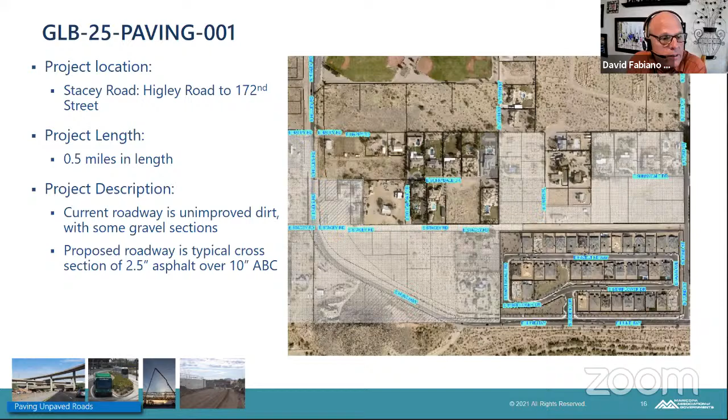Next slide, Steve. That's our typical cross section that we're looking to put in there, a local residential street. Because of the drainage and the offsite drainage coming across and through along this facility, it creates a bit more of a challenge. We're trying to fit into this environment as gently and carefully as we can to get something maintainable for the long term.

The town is willing to annex the entire road and take it over for maintenance, even though it does have those unincorporated areas along it. Next slide.

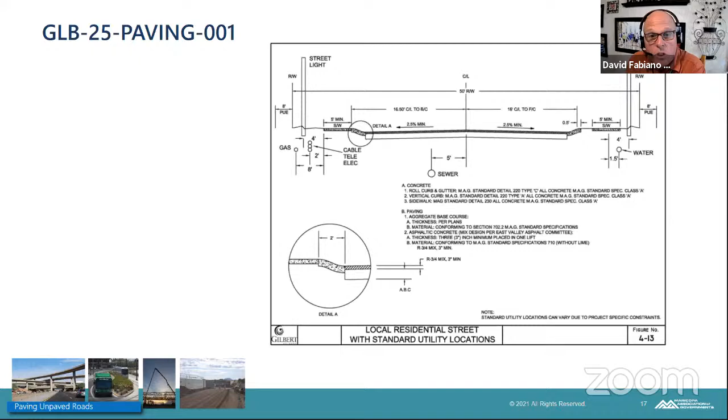Here's some pictures so you can see some of this, on the east end. You're at the first picture, at 172nd Street looking to the north. And we always put power poles in with nothing on them, leaving them sitting right in the middle of roadways. Over on the right side of the screen, again, lots of hair on this one -- we're trying to cut it, clean it up. That's where it comes onto Higley Road.

This is an area where sight distances and a lot of other things are going to have to be taken care of. Drainage is coming again from the south and east, across Hunt Highway, off the Santans, causing quite an impact to these residents locally when it rains.

That middle picture shows the new subdivision on the southeast quadrant of that quarter section, and that's the part the town actually owns -- that piece that's dedicated, kind of back behind that shrub that was left there. But the road improvements were never made. That developer did make a payment of $160,000 for their portion of it, but that estimate was premature because the impacts are quite a bit larger than that.

Next slide, please. Okay, I think that was the last slide. So this is, again, one of those areas where we're in a checkerboard situation. The town has a small responsibility right now, willing to take on more, because it's one that the county really is probably not well suited to be able to handle.

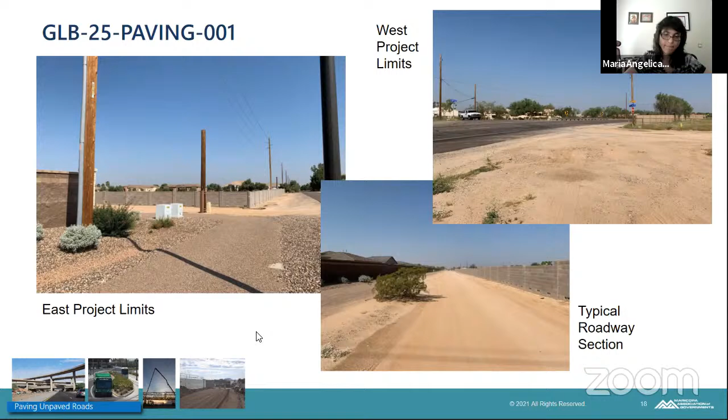Next slide, please. This project is from the city of Maricopa, for Murphy and Hartman Road. Rudolph Lopez will now present.

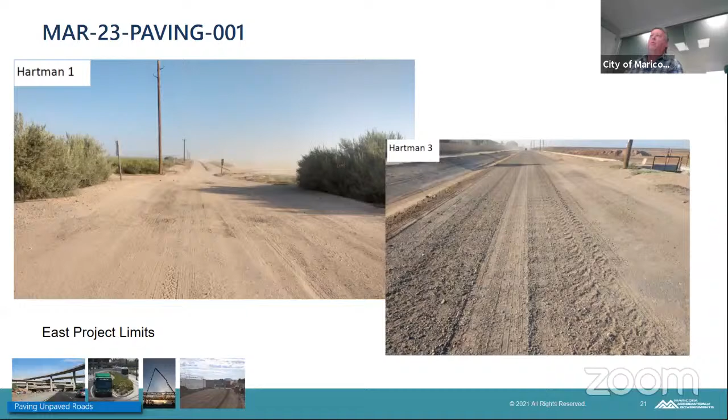Madam Chair, this is Mike Riggs. Our property city limit boundary ends on the north side there, if you want to go back one page on the map. However, that is Gila River Indian community next to us. There is a full section of property within a quarter mile, like a little island within the reservation property lines that are trying to go in for planning for future residential.

So eventually it would include the residential traffic from the Indian community to the north of us, and then potentially in the future, it would help cover some of that residential traffic coming out of that island within the reservation.

Thank you. David? Yes, just one more question. With that future traffic you've referenced coming from the north, is the double chip on 8 inches a section that the city is comfortable with, or is that just more of an interim section to try to improve the condition until a future time?

Thank you, David. That would be an interim solution for now. We don't have a ton of information on that residential section, so it's interim for now.

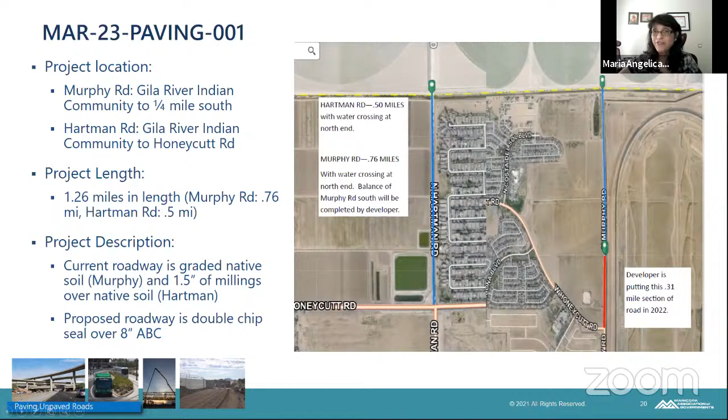Steve, please present the next presentation. Okay, the next slide is from the Salt River Pima Maricopa Indian community. It's for Clarendon Avenue and Cholla Lane, and it will be presented by Jennifer Jack.

Good afternoon, Madam Chair and Street Committee. My name is Jennifer Jack with the Salt River Pima Maricopa Indian Community, and I have 3 projects that I'll be presenting. The first one is Clarendon Avenue and Cholla Lane. Next slide.

This section has a little piece in between that doesn't connect to Cholla. So it's Clarendon from 92nd to Dobson, and then Cholla from Indian School to Clarendon, and then Clarendon from Cholla to Longmore Avenue. The total length is 1.13 miles, and it's currently a gravel surface.

We are proposing to pave with 2 inches of asphalt over 6 inches of ABC. There are currently 9 homes on the first piece of Clarendon, 4 homes on Cholla, and then 3 on the other section from Cholla to Longmore.

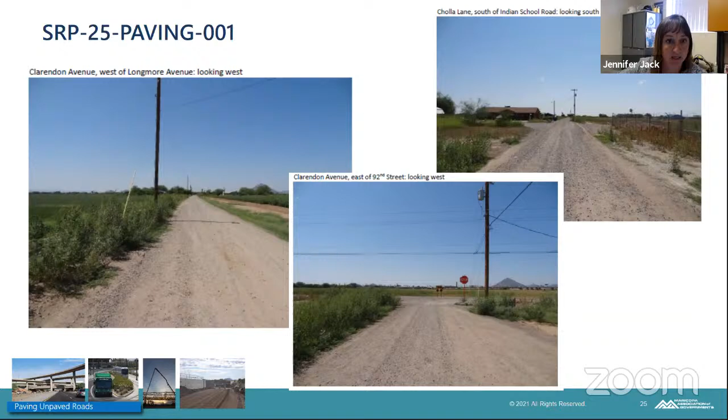We'll go ahead and go to the next project. Next slide, which is Jackrabbit Road. Next slide. This is Jackrabbit from Dobson Road to Alma School. And this does have a school bus route on this roadway. It's 1 mile in length, and there are 10 homes located along this segment.

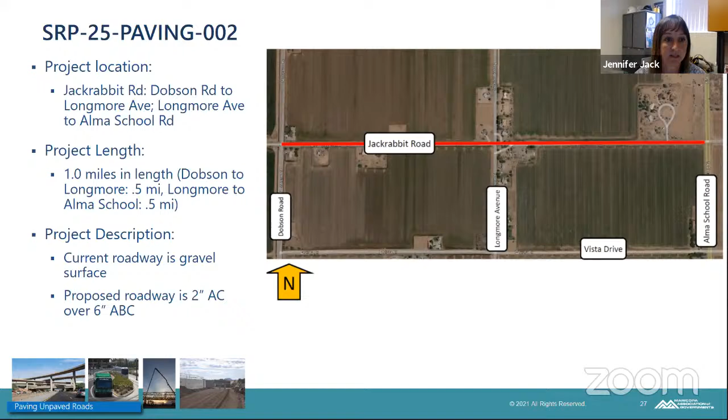Next slide. Our final project that we're presenting today is Osborne Road. Next slide. This is from Westwood Street to Extension Road. It's a quarter mile, and there are 7 homes along this segment of roadway. It is also currently gravel, and we're proposing the same 2 inches of asphalt over 6 inches of ABC.

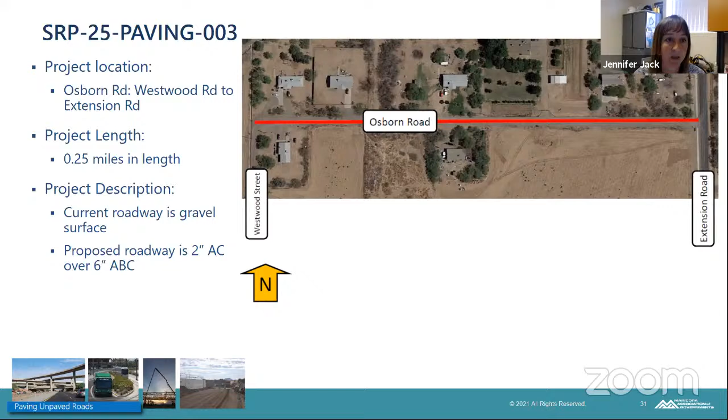Next slide. This one again is a 24-foot wide roadway, typical section. And next slide. This is pictures of what this roadway looks like. This concludes the roadways we are submitting applications for, and I'm happy to take any questions.

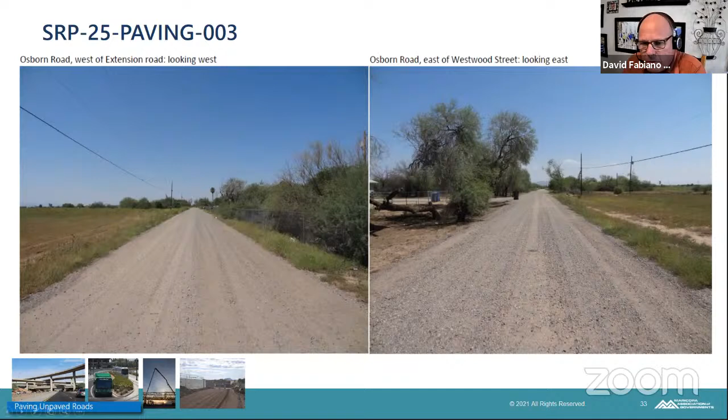Okay, perfect. Thank you. I want to recognize David Fabiano. Thank you, Madam Chair. Jennifer, on the Clarendon, the first project that you showed, it turned and went north to get up to Indian School rather than just continuing on over to Dobson. Is there some reason for that change there?

There is a reason. There are some residents there that the road does not go through. It does not connect, and they are not interested in having that traffic connect. So I doubt they will dedicate the easement to make it connect. But anyway, currently there's not a road that connects there. Thank you.

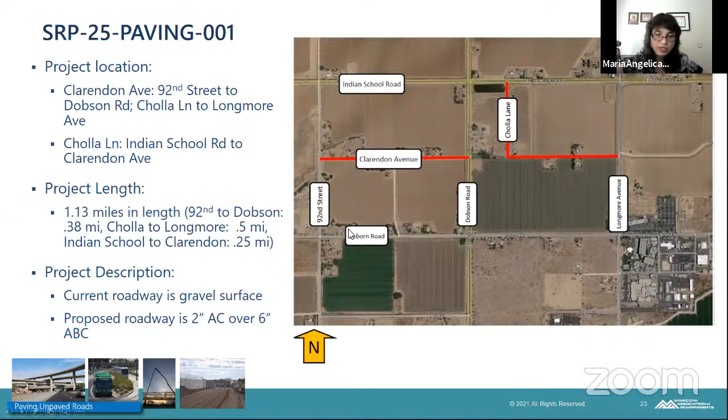Jennifer, I do have a question. In the Jackrabbit project, your typical section includes streetlight and sidewalk. Is that part of the project scope? It is not. That is just showing a place identifier for roadways that do include those.

As far as the sidewalk goes, we have a trail system map, and if the roadway is located on a route that has a sidewalk or trail, then that's where it goes. Jackrabbit is not identified on that map, so this is not part of the project, and we do not intend to do that. Thank you, Jennifer.

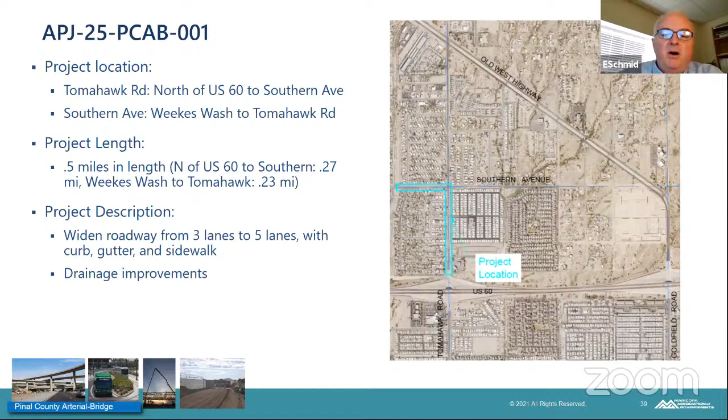Same with Southern Avenue. The road has 5 existing lanes, 4 travel lanes and a 2-way left turn lane, which drops a lane and then has no sidewalk starting about 1,000 feet shy of Tomahawk Road. Next slide, please.

So here is a graphic showing Tomahawk Road. You can see the yellow represents a sidewalk, and the red or magenta is the curb and gutter that would be going in. And of course, we have a blue line for storm drain addition.

The addition of the storm drain is there to help with ADOT's issue, where currently the runoff will continue flowing south along Tomahawk Road and flowing under the freeway bridge, causing some flooding issues to a car dealership at the south of the freeway.

Here we have two sections, one existing, and at the very bottom you can see the proposed section with the pavement widening, addition of the bike lanes, curb gutter, sidewalk, and street lights. Next slide, please.

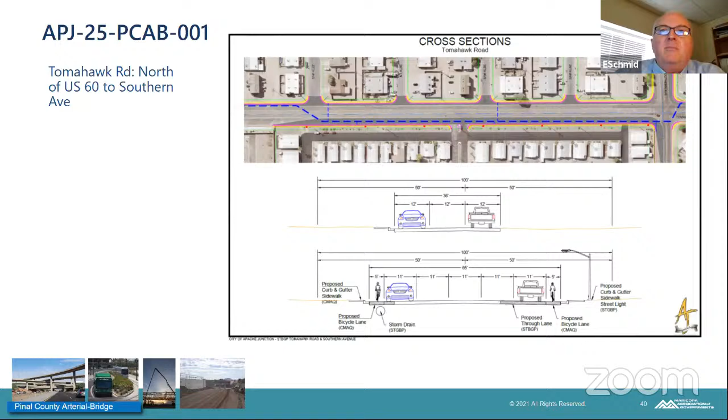This is Southern Avenue west of the Tomahawk Road intersection. Again, you can see where sidewalks will be added. The red dots indicate locations for streetlights, and we will be widening to match the full width that we have west of this location and continue that full width geometry to the intersection.

You can see that on the road sections that we have at the bottom there: 2 travel lanes in both directions, a 2-way left turn lane in the middle with curb, gutter, and sidewalk. We do not show bicycle lanes on Southern Avenue since the existing road section west of here, the 4,200 feet of existing road, does not have a bicycle lane. So we're matching that section towards Tomahawk Road. Next slide, please.

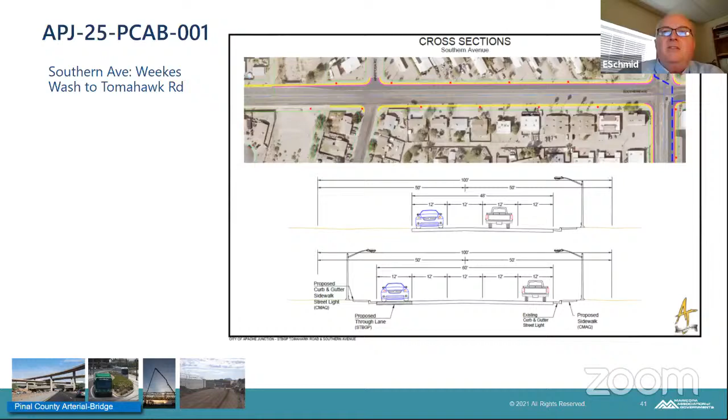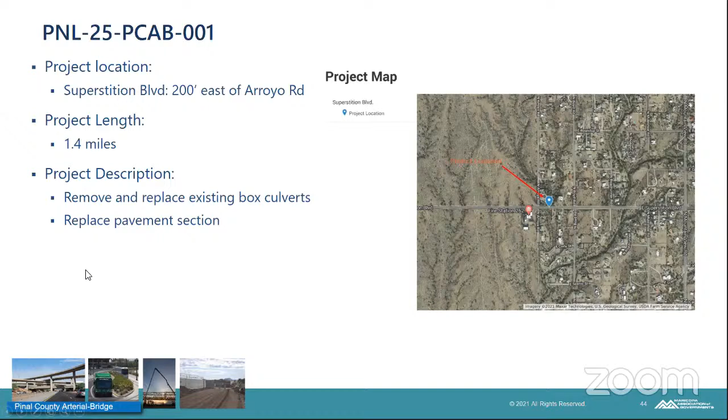One interesting note is that there's a fire station just 200 feet to the west of this culvert crossing. When the roadway overtops and is closed, that fire station has to take a 4-mile detour just to get to the other side. So this is a very important crossing that we need to provide adequate conveyance for, so we don't have to close the road.

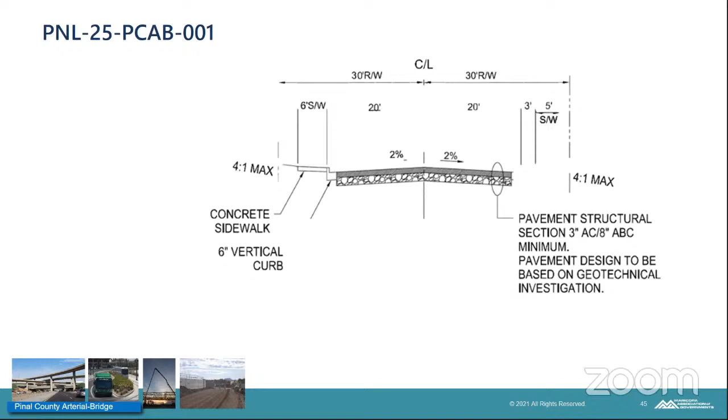This slide shows our standard cross section for this type of roadway. In addition to replacing the culvert, there will be some pavement replacement above it. There will not be curb, gutter, and sidewalk as shown on this cross section because this is a rural area with no existing curb, gutter, or sidewalk to connect to. The total cost of the project is estimated at $1.65 million, with 12.8%, or $210,000, being the local match. Design will be funded separately leading up to the construction year.

Thank you, Chris. I want to acknowledge David Fabiano. Thank you, Madam Chair. Chris, question: improving that throughput, and this looks like a very appropriate and good project, wish you well with it. Regarding downstream impacts with increasing the throughput that much, have you looked at the hydraulics downstream and what that's going to do? Is the conveyance system adequate to carry that through without the attenuation that little choke point currently provides?

Thank you for the question. At a preliminary level, that's been looked at, and we believe there's plenty of capacity in the existing drainage corridor to convey this runoff. But as part of the design process, the hydrology and hydraulics will be refined in much greater detail than what we have at this point. We do believe this project will not increase flooding on homes downstream.

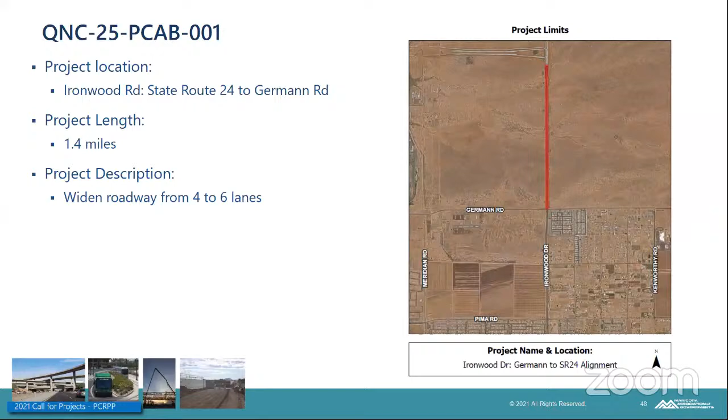In our transportation plan, Ironwood will operate as a principal arterial. It's designed to handle the bulk of our commuter traffic on the east side of town, connecting commuters with State Route 24 and the US 60.

We're proposing at this time to add two 12-foot outside lanes and reinstall the 8.5-foot paved shoulder with a structural section of at least 5 on 12, and reestablish the safe slopes on the outside prism. As adjacent land develops, they will add the curb and gutter, sidewalk, luminaries, access points, and any future signalization. We're very early in the stages of it, but it is our intent to establish a utility corridor outside of the paved area.

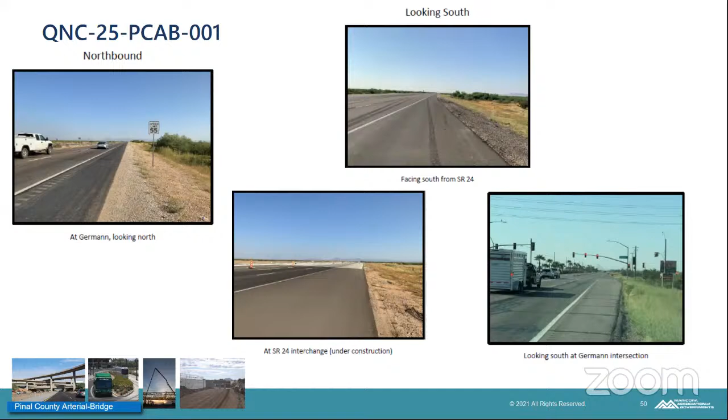Yeah, if you can go back one slide. So we are probably not going to do a raised median. Right now we have the divided highway with the cable guard separating the two directions. I believe we're intending to remain with that in the future. There is some drainage along there as well.

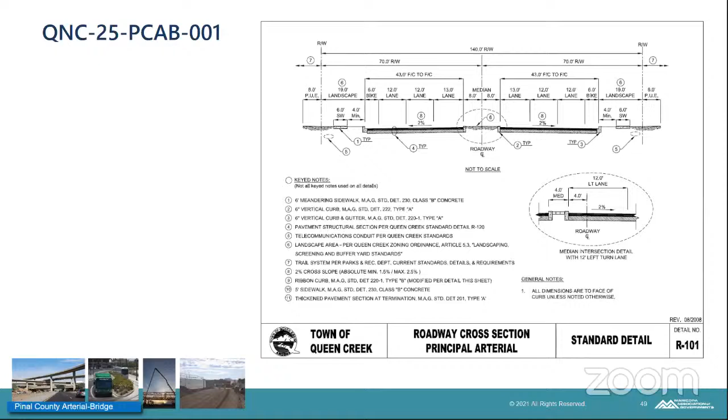Jan, I have a question. You mentioned that one of the project limits is SR 24. Does Queen Creek have the right of way already from ADOT, or are you waiting for SR 24 to be completed and then have that in your inventory? So where ADOT's right of way ends on the south side, we pick up from there, and then we go all the way south through to Ocotillo Road. Thank you for that clarification.

Any additional questions for Jan? Hearing none, does that conclude our presentation, Samantha? Yes, Madam Chair, we only had the 3 applications, so that would be it. This item was just for information purposes.

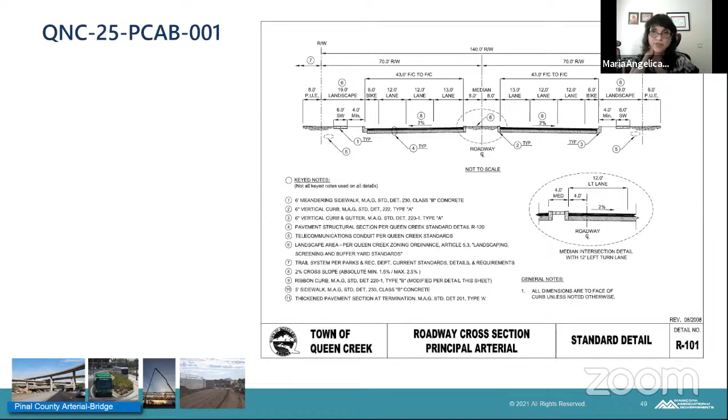Agenda item number 8: are there any requests by the street committee members for any item in the future agenda? Anderson, Patrick got back to me after the last meeting, regarding trying to figure out a way to alert the jurisdiction if a member does not attend for 3 or 4 meetings in a row. Attendance is beneficial to the communities, and so far there's nothing in the procedures for committees on that. So maybe it'd be a good item to discuss in the future if we have somebody — not the jurisdiction, but the individual — so we can alert the jurisdiction that they have an individual that is not attending as per what they've appointed, and that we'd like to have attendance, both because of a quorum and because of the information passed along.